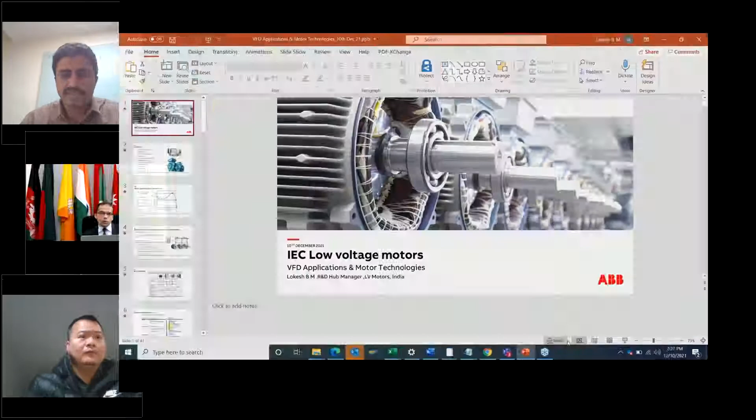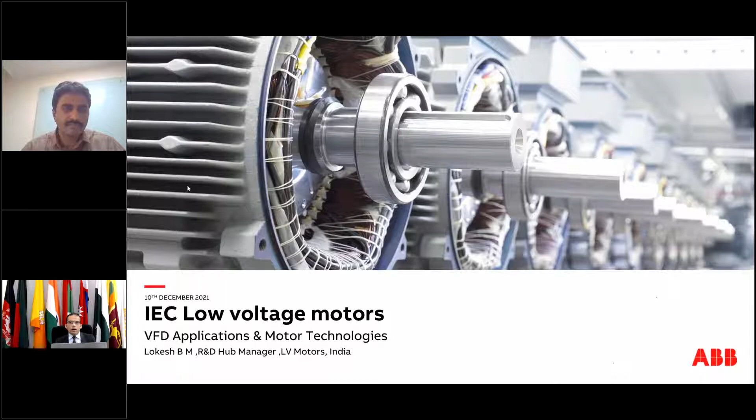Sir, excuse me, your screen is not visible. Okay, you may share your slide please. Can you give me that option for sharing? I can't see anything. Okay, now can you see? Yeah, perfect, okay thanks. Okay, let's get into the topics, what I wanted to share. I'm able to move the slide... not able to move the slide. Just click on the presenter, not on the software. Just click on your PPT file, PowerPoint file, and then you will be able to move it. Okay, yeah, now it's moved, I think. Yes, we can see your software.

Okay, thanks. So as I said, the main contents would be on motor performance characteristics. This is the basic concept. We see on the TS curve, the starting performance of the motor. With this, we go into why VFD duty motor, or why VFD is required for motors. Then there are certain points where on the checklist we need to go while selecting a motor for VFD applications. Then the type of loads, which is very important—we need to know what type of load, for which application the motors are being given. So we try to see different types of loads and have a look at that. Then of course the loadability curves with respect to VFD duty motor. Then we go into what exactly is the savings with respect to VSD. While we see all this, there are some challenges or precautions we need to take while using our motors for VFD, right? So this is also important, so we would like to cover that also, and what exactly we need to pay special attention to while selecting motors for VFD applications. Then finally, the learnings from all these slides. And then I would like to touch upon energy efficiency topics, and finally the case studies—I have collected some case studies where our motors have gone and installed at customer sites, and what exactly is the benefit the customer is going to have.

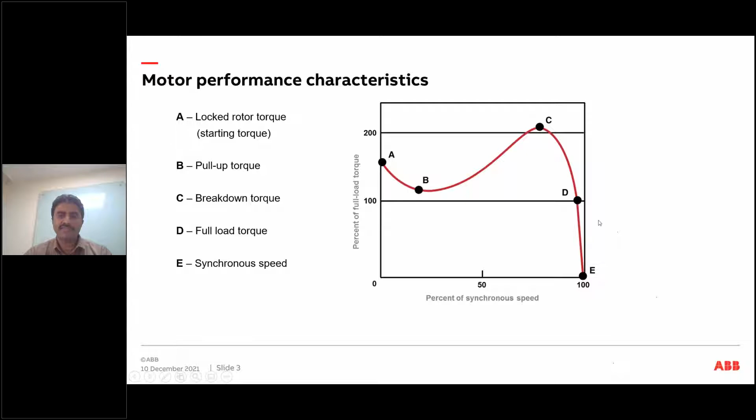C is the breakdown torque, or what we call POT, pull-out torque—in other words, the maximum torque that the motor can develop. This is on a DOL curve. So what exactly will happen with a VFD? This can be pushed much earlier at different speeds, or lower speeds also. So whatever is the maximum torque, that can move up to 10% RPM or maybe 20% RPM. So throughout the speed range, you can get the maximum output or maximum torque levels. D is nothing but the full load torque, and synchronous speed is what is mentioned as E. So this is the typical torque speed characteristics of the induction motor.

Now going to the next topic, when it comes to selection criteria of an induction motor for VFD applications. So what exactly do we need to take care of?

Why VFD? This question comes to everybody's mind. If you want to change the motor speed in a DOL application, would it be possible? Definitely it is not possible. So when you want to change the speed different from the rated RPM, you need to have some options. One best option would be using a VFD.

What are the main reasons we get more energy savings with respect to VSD, and also there are some other benefits. So we would like to see that.

We get a very soft start while using VFD, starting from 0 RPM to the rated RPM. It will be a very smooth start. Compared to DOL, what happens? DOL motors give full voltage and full current at a time. The moment you switch on the motor, it starts taking the full current, so the starting current will be very high, and accordingly you need to select all the equipment. In VFD, it will be a soft start because you are lowering the RPM at start and then reaching the maximum RPM.

What exactly is the benefit? You get a longer service lifetime with respect to mechanical components because it is a very smooth start, you are not giving any jerks on the motor. Then on the finished product, you are controlling the speed and other things with the most precision, so on the process side you get the best quality of the product. Overall, it also increases the efficiency of the system.

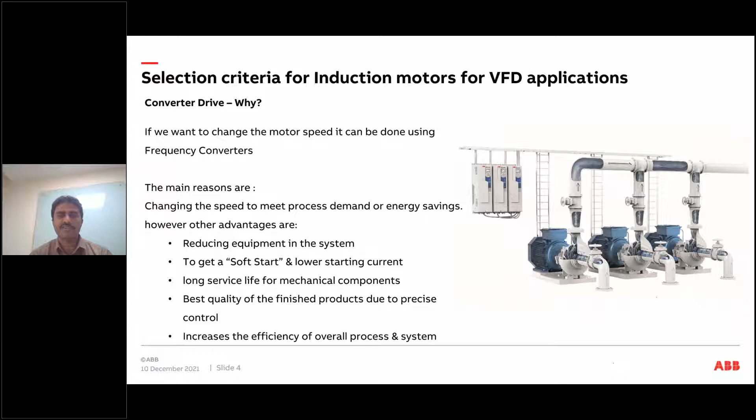So going to the next, this is the basic principle. Whenever you are dimensioning or selecting a motor and drive, you need to consider some important parameters listed here: the network side, the converter aspects of what VFD unit to select, the motor point of view, and also the load perspective. These four things have to be considered for a VFD duty motor.

On the network side, you need to know what voltage is coming onto the motor from the input side, from the transformer side - like 380, 415 or 690 volts. Depending on that, the insulation systems will also change with respect to the motor. For a 415 volt system there is a separate insulation, and for 690 volts there is a separate insulation. I will come to that topic in the next coming slides.

Similarly, from the converter point of view and the motor point of view, you should know the thermal loadability of the motor, and also the speed range - what is the minimum speed, maximum speed, which is also important, and the maximum torque required, so you should know what maximum torque it can deliver. From the converter point of view, you need to know the load type, whether it is a centrifugal curve, constant torque, or constant power. These things are very important while selecting or dimensioning the motor for VFD. So all these are the four parameters you need to consider.

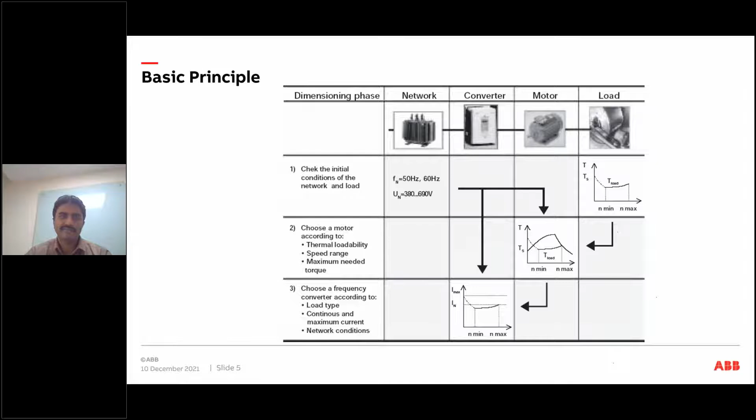You need to know exactly what voltage is coming onto the motor terminals so you can take precautionary measures. There's a new IEC standard that has come into picture which mentions IVIC class category, and it mentions the starting levels and severity levels with respect to A, B, C and D categories, with D being the extreme. So we give the insulation class which is able to meet the C category level.

We should know what exactly is the site condition, what is the voltage level at site. So all these parameters like peak voltages, dV by dt, rise time, bearing currents, or any overheating due to harmonics, all these things have to be studied before offering the motor for VFD application.

Also, as I said, you should know the maximum torque. Bearing construction and lubrication is also an important factor because for VFD applications there will be circulating currents if we go to higher ratings, like from 100 kilowatts and above. So there may be chances that the bearing might fail.

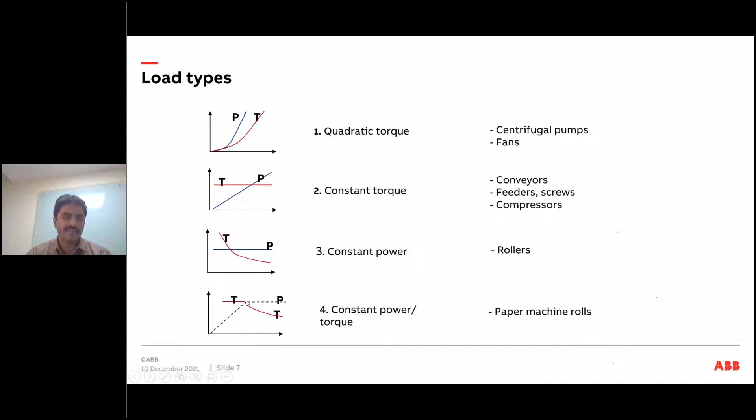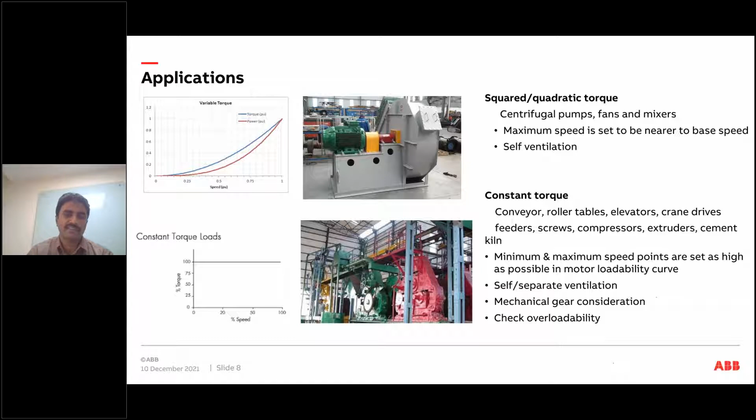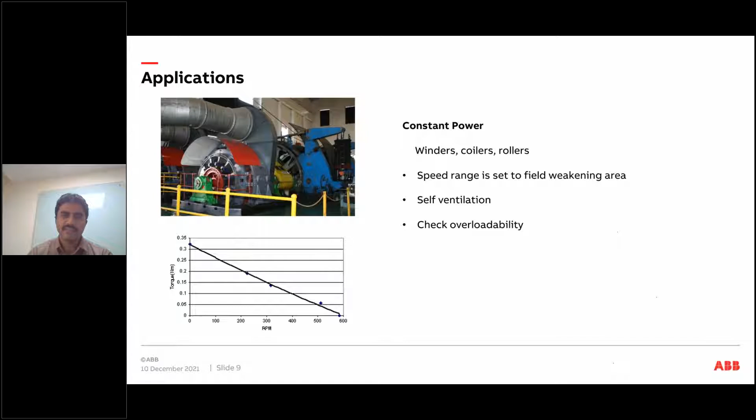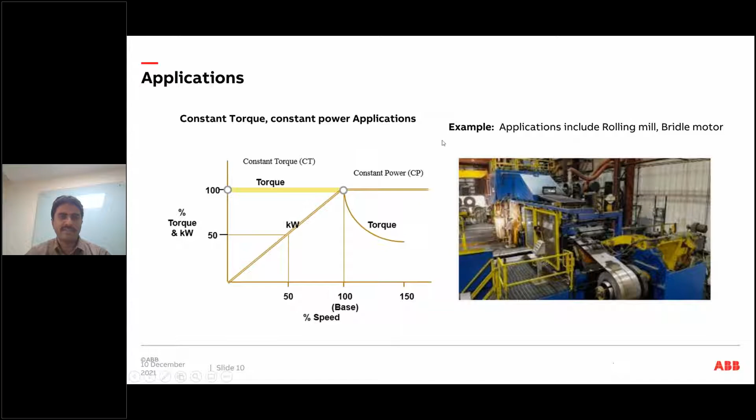Now after seeing the different loads, we jump to VFD energy savings. So how exactly do we get the benefit while using a VFD?

If you see a traditional pumping station or pumping system, it is controlled by a mechanical system like throttling and other systems. What exactly happens is you will not have control on the flow, so therefore there is no energy saving with respect to a traditional pump.

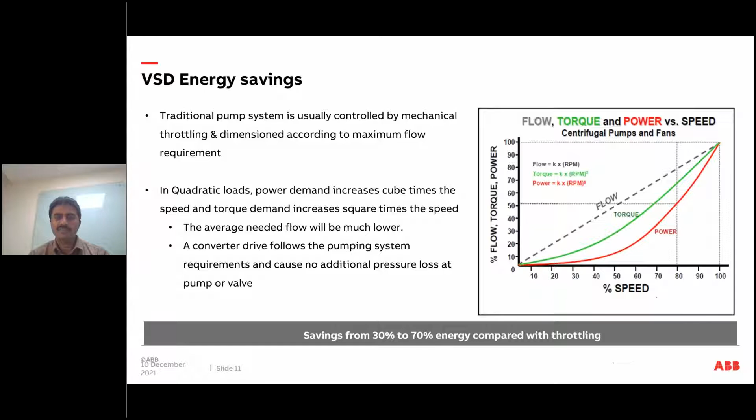But when you are using a VFD, you can much more precisely control the flow by varying the speed. A converter drives the pumping system according to requirements, and therefore there is no additional pressure or loss in the pump or valve. This is the benefit you get. The savings from this can vary from 30% to 70% with respect to throttling application.

I would like to take one example here to show you which of the methods is better when controlling a pumping system or pump application. If you see from the affinity laws, how does the pump or fan vary? We've seen in the previous slide: flow is proportional to speed, pressure is proportional to the square of the speed, and power varies with respect to the cube ratio.

When we take a typical example, a pump running at 80% of its nominal speed will produce 80% of its nominal flow. If you see here, 80% of the flow, but when it comes to power consumption, it is only 50% - the dotted line shows only 50% energy needed. Now you can understand what is the requirement here.

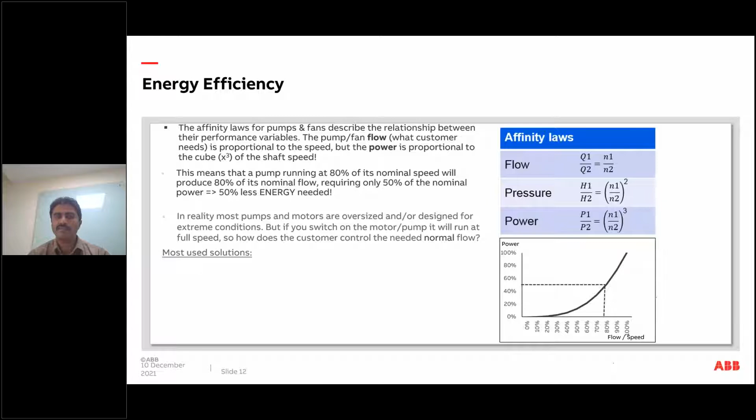But in reality, most pumps at site are oversized or over-designed due to considering extreme conditions. If you are not using a VFD, when you use a DOL and switch on the motor, the pump will operate at full speed, so you will not have any control with respect to the normal flow.

Let's see the different methods used on the traditional aspects. One is throttling, where you control by closing and opening the valve - this is one traditional method. The second traditional method is bypassing, which is also very popular. And the third is on-and-off control. These are some of the traditional methods the pumping system has used.

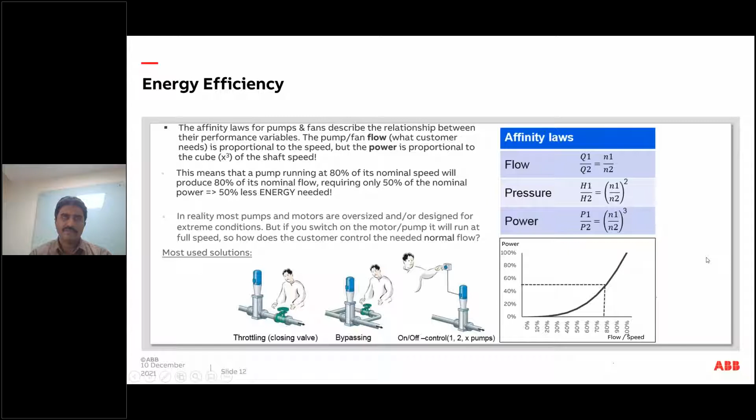Now let's continue with that example and see how these traditional methods behave with respect to energy efficiency. We take one example comparing the needed flow, considering 70% of the installed nominal capacity. So with respect to 70% of the installed nominal capacity, what exactly is the power consumed?

By bypassing mode, with similar calculation, the power consumption is 82%. So definitely this is also not energy efficient.

When it comes to on-off control, when you calculate the power saving, only 70% of the energy is used. So definitely this is also not energy efficient.

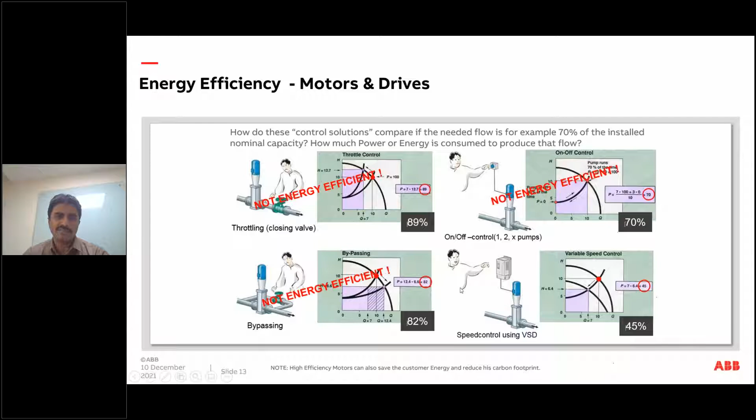The same application, when you prefer a VFD, you can see the curves here - the power consumption is 45%. So you can compare all three traditional control applications with the VFD, and you have a better saving here. Definitely this method is preferred for energy saving.

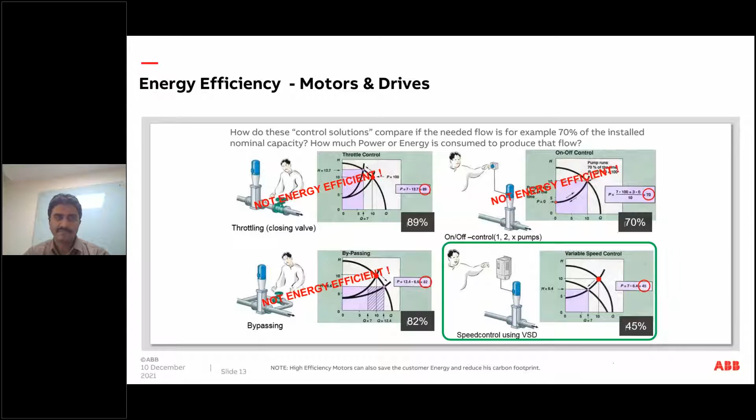So similar to the pumping station example we saw with one single pump, when we talk about system efficiency, here we have a pumping system with two setups: a conventional pumping system and an energy efficient pumping system. The energy efficient system shows a huge difference, where the system efficiency of the conventional system is 28% while the energy efficient pumping system is 82%.

So what exactly makes this difference? If you see the motor, the standard motor used has an efficiency of 91%, but the energy efficient pumping system uses an energy efficient motor with efficiency of 96%. This is a huge gap, and it's contributing to the energy saving.

What happens with respect to this? When you do the input power calculation, the input power consumed for this particular application is 122 kilowatts. For the conventional system, it is 358 kilowatts. You can see a huge difference here, and that is why the efficiency of the pumping system has been increased.

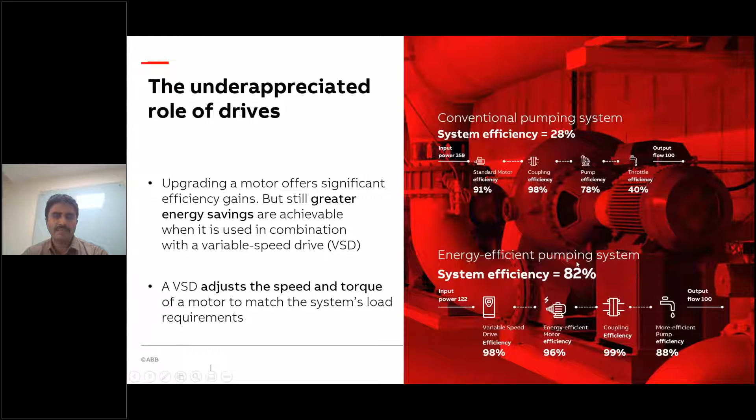Moving on to the next slide, as I said in the beginning, while selecting a VFD, there are certain conditions or criteria we need to consider. These are challenges or problems to prevent by using VFD motors, and one such topic is the winding insulation. This is a huge topic, but I won't go into much detail here.

On the insulation grounds, for different voltage levels the insulation category is going to change, because the higher the voltage, the higher the stress on the winding. So you need to take care with respect to the winding system. Winding is the heart of the motor, so you need to give a lot of precaution with respect to VFD applications.

If you talk about the 500 volt system, UN is nothing but the rated voltage. If it is less than or equal to 500 volts, we prefer standard insulation. If it is less than or equal to 600 volts, you need standard insulation plus a du/dt filter, or you can go with special insulation instead.

What happens if it is less than or equal to 690 volts? For 690 volts, you need to consider special insulation and also du/dt filters at the converter output. You might have experienced that for any 690 volt drive, the du/dt filters are by default included. And for 600 volts or less than or equal to 690 volts with a cable length greater than 150 meters, you definitely need special insulation.

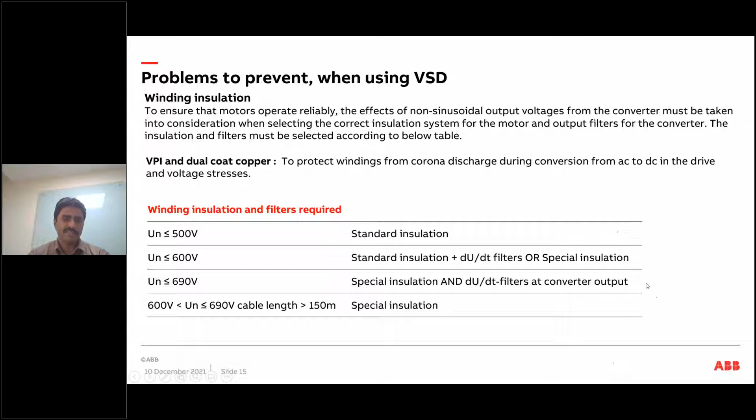Talking about bearings, when exactly do you need an insulated bearing? For VFD applications, you need to keep in mind there will be a circulating current. Every motor will have a circulating current, but as the rating goes higher and higher, the circulating currents will also be higher, which will harm the bearing. Since it's a circulating current, it forms a closed loop, so bearing damage can happen. So how do we prevent this?

For ratings lesser than 100 kilowatts, we don't have to give an insulated bearing because it's not so harmful—this is based on studies we have made. Similarly, if it's greater than 100 kilowatts, or falling under the 315 frame, or the 355 frame, you definitely need to give an insulated bearing at the non-drive end.

Why do we prefer the non-drive end? Because the starting point is from the shaft, and it will circulate through the non-drive side bearing. So if you provide insulation at the non-drive end, the circulating current is going to break there—to break the loop, we give insulation at the non-drive end.

There are some other options other manufacturers give, such as providing insulated end shields—that's also an option. Whatever we do, we need to break the circulating currents, that's the intention. Any rating greater than 100 kilowatts, or in the 315 frame, will go with an insulated bearing at the non-drive end. For 400 frames and less than or equal to 500 frames, we need to give an insulated bearing and also a common mode filter, which we'll talk about in later slides. This will also reduce the bearing currents.

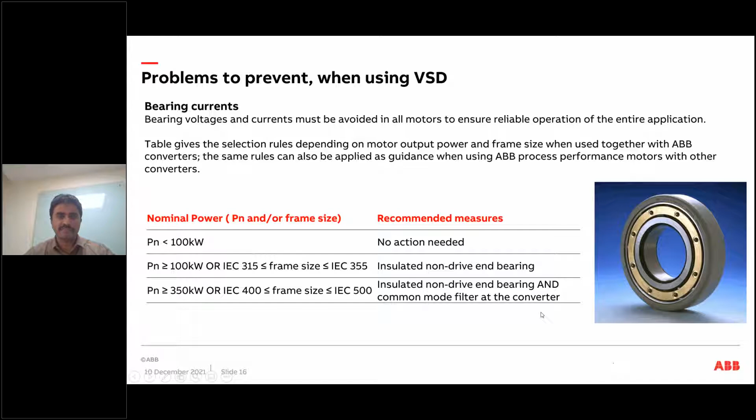So we saw the insulation part and the bearing selection. Now we talk about the entire system.

What is EMC? We call it electromagnetic compatibility. This is nothing but when we use high frequency components in the VFD, this might cause electromagnetic interference. Definitely there are other equipments connected at site, there may be plenty of equipments where motors and drives are there, so they should not harm the other equipments because of this interference.

So how exactly do we do that? You see the picture here, there are certain things we need to take care of. On the cable part, we provide proper shielding to the motor terminal box, and there are possibilities where we can provide EMC glands which are available, and also EMC cable boxes. So by providing this, the problem of electromagnetic interference can be avoided.

So another aspect with respect to common mode filters and DU/DT filters. We will see what exactly is the difference. What are common mode filters? Common mode filters are nothing but they are installed at the output of the frequency converter. You can see the picture here on the right hand side, these are circular cores which are in red color, these are the common mode filters, provided at the output of the frequency converter.

So why do we give this? These common mode filters definitely will reduce the risk of bearing currents. That is the reason we talked about bearing currents there. So by providing this, you are reducing the bearing currents.

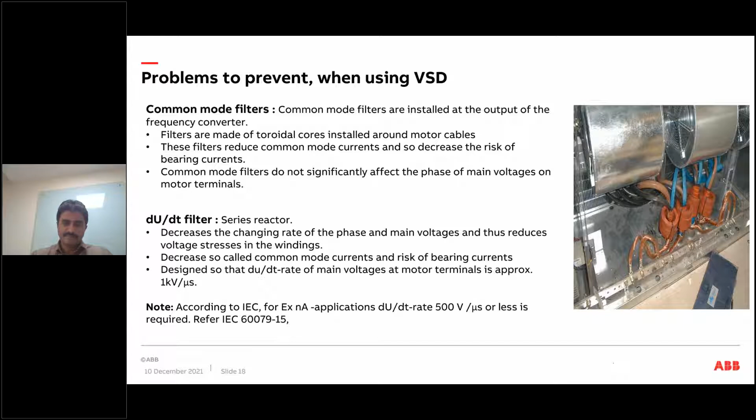So what exactly we learned from the previous slides, I will just put on the bullet points here. You can read here, the first point would be on the selection of the motor, like select the motor according to the correct load type. You need to know the load, what exactly is the load, and what exactly you need to give from the motor or drive perspective. This is an important point.

So use the correct minimum speed for the constant torque drive. You need to have the minimum speed and maximum speed, this is also very important with respect to applications. Sometimes you give force ventilation, so it can be more optimized than self ventilation.

So force ventilation, when do we give it? When we have a speed range lesser than maybe 30% of the speed, there we recommend force cooling. If you are opting for force cooling, you can give it in the same frame because that is being taken care of. And if you are opting not to give force cooling, then we can still give that, but the frame has to be derated. That is why I'm saying it can be more optimized sometimes with respect to self ventilation.

So the fourth point is on limiting the temperature rise with respect to class B. If you see the insulation perspective, most of the insulations what we give is class F, and when it comes to temperature rise, it is limited to class B. So why do we limit with respect to class B? Definitely the temperature rise is one of the important factors.

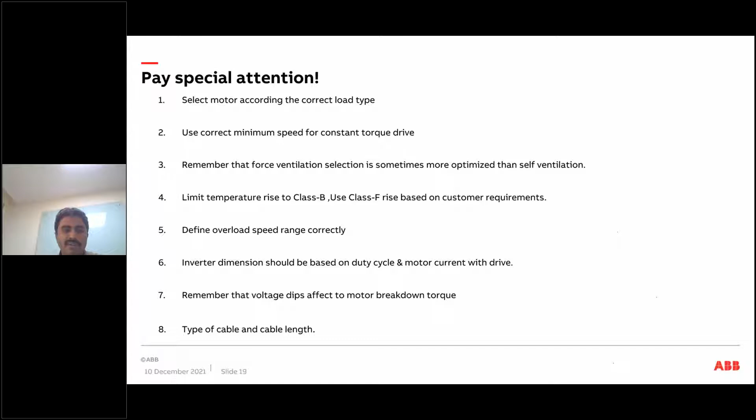Finally, concluding on this, whatever you saw on the previous topics - there are 5 questions you need to ask. What is the application, which is very important? What type of load, the speed range, and the overload cycle? So the first 3 are very important, and then type of VFD. This also matters sometimes, and whether the motor starts with DOL or not. Sometimes we get an inquiry where even though it is for VFD, they want the motor should be suitable for bypass DOL. So if you're not considering the DOL option, you can end up with problems with respect to starting current. All those aspects will come into picture.

I think we are covered on the VFD part, on the application part. So now we will jump to the energy efficiency part.

Before going in, this is a general slide, most of you might have seen. If you see the electricity used by the power industry, greater than 40% of the electricity is used by the power industry, and when it comes to motors, two-thirds of it is used by only electric motors. So now we can imagine why motors are very important. There is a huge place where you can do energy savings with respect to giving energy efficient motors. So our job, as a manufacturer, our option would be to save energy and optimize operations in a sustainable way.

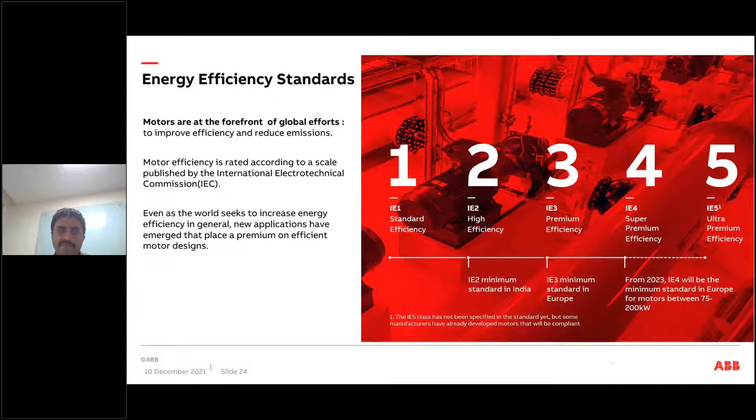So whenever we talk about efficiency, we always say efficiency from IE3 to IE4, IE3 to IE5. So what exactly do we do? Talking about efficiency is nothing but output by input.

There are loss factors which are considered, like I square R loss with respect to stator and rotor, and different losses with respect to friction, windage, and stray load loss. The moment we try to reduce the different loss factors, your efficiency is going to improve. So that is how we do it.

But when I talk about the positive effect on the life cycle cost, there are 4 important parameters we need to consider: the quality of the motor, the noise levels, the efficiency class, and the temperature rise. If you are taking care of these 4, you will have a very positive effect on the entire life cycle cost. So how exactly do we do it?

As I said, there is high permeability steel or superior steel quality, so the iron losses are going to come down, thereby reducing the magnetic losses. Similarly, you're putting more amount of copper in the windings, therefore the I square R loss, the copper loss, is going to reduce.

So how do you improve with respect to quality? Definitely there are improved bearing housing designs, use of quality bearings, and grease. So all these things relate to the quality of the product, right?

From the noise perspective, definitely you can go for improved airflow, improved fan designs or fan cover designs, or bearing designs. So this is how you reduce the noise factor.

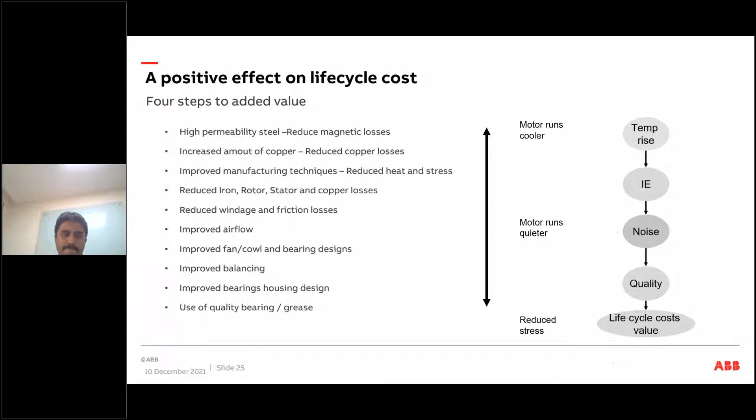So talking about different technologies, these 3 are the running topics on motor technologies. If I talk about the induction motor, definitely there are certain limitations above IE4. When you start designing or reaching IE5 levels, it is very difficult with respect to induction motor technology.

That is why there are different new technologies which have come into picture, like SynRM, synchronous reluctance motor, or a permanent magnet motor, and for the next futuristic technology, maybe a ferrite assist SynRM motor.

Talking about SynRM, it has a great advantage compared to all other technologies because there are no magnets in this rotor. If you see the rotor design, because of this new rotor design shown in the picture here, there is no induced current in the rotor. So therefore there are no rotor losses. Completely, the rotor losses are zero. So you can imagine the difference in efficiency.

We will see in detail much higher advantages. On the efficiency point, there's higher power density, accurate speed control, lower bearing temperatures, and it's easy to maintain because there are no magnets here, only the rotor profile is different. So you can straight away replace the rotor of a SynRM rotor on an induction motor.

So that kind of flexibility is also available. As a package, efficiency is always verified with respect to testing and designed exclusively for variable speed operation.

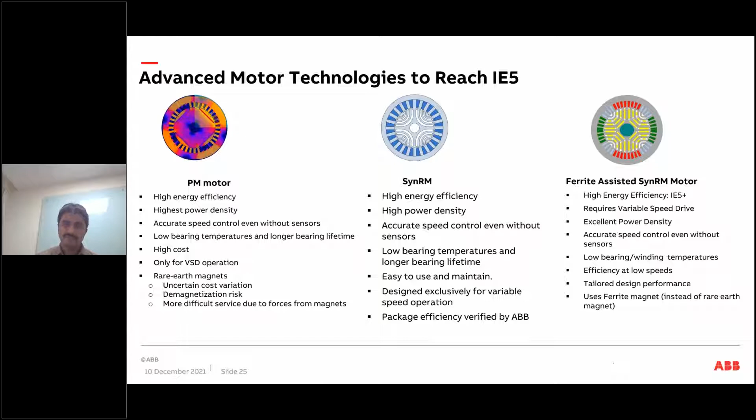So talking about the innovative motor and drive packages, when it comes to a package with respect to SynRM technology, you can see here there is a standard motor you can add with a special rotor of a SynRM design.

And when it comes to the standard drive, you don't have to replace the drive. There is new software which can be inserted in the module. So you can still use the same standard motor, standard drive, with a special rotor and new software. So it gives a revolutionary drive package.

And in this, we have two options where there is a high output SynRM package. Higher output means you are giving a higher output in maybe a lower frame. So what happens in this? When it comes to overall equipment size, definitely it is going to come down, and from the cost perspective also you will get maximum benefit here. So this high output package series is also available.

And the IE5 ultra premium efficiency SynRM package, as I said, energy losses are reduced by 40% compared to IE3. And the most advantage would be these are interchangeable with IE3 induction motors.

So what is the key to success with respect to SynRM technology?

If you look at the IE3 induction motor, there are different kinds of losses. From the 100% losses, you have rotor losses, stator losses, and other losses like friction and windage. On the IE5 SynRM motor, straight away 40% of the losses, the rotor losses, are eliminated because there is no induced current, so there are no losses in the rotor. You get a 40% reduction in losses, so definitely your efficiency is going to increase.

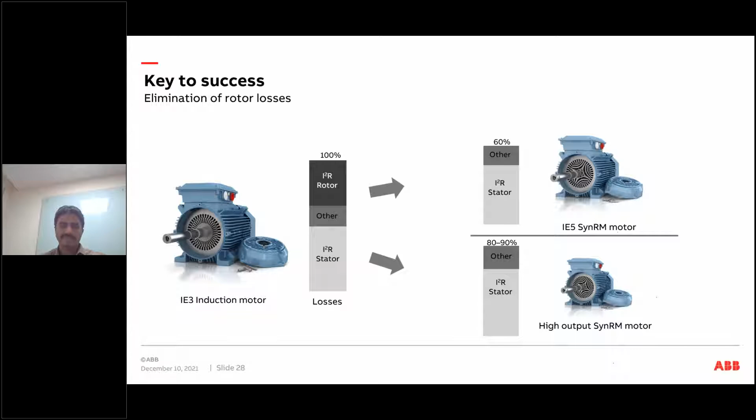Overall, these are some of the benefits when I talk about induction SynRM technology and drive as a package for a customer. These are magnet-free designs, so there are no magnets, making them user-friendly and service-friendly. Packages are available for quadratic torque applications like pumps and fans, and these are very competitive with new technologies. From the reliability point of view, there's lower bearing temperature and a lot of benefits. These are designed for variable speed operation, and advanced open loop control softwares are available. On the support side, you have global ABB support, though not many models have been given and there isn't much experience yet with SynRM technology.

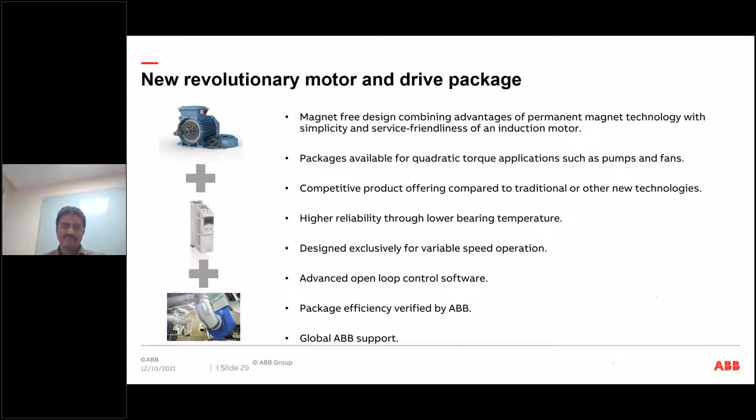I also wanted to touch upon a topic that's coming in the future. A new standard has come, IEC 60034-30-2, which defines IE class efficiency and also allows you to compare different technologies.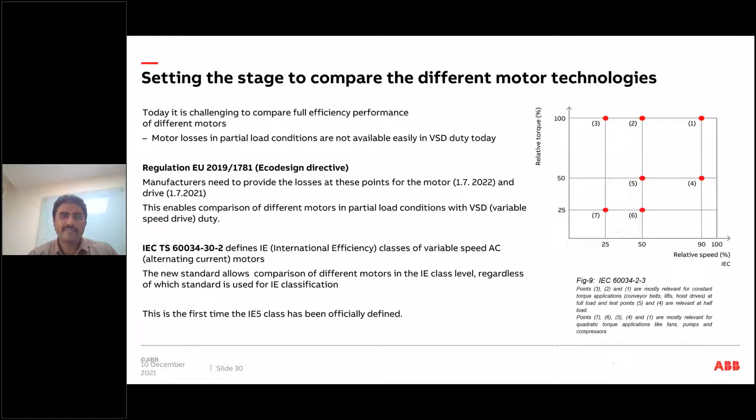This will definitely be implemented next year. So talking about SynRM here, this is why I mentioned the different load points at different speed variations - it's very important.

So imagine, at partial loads, a benefit of 6 to 7% efficiency means significant savings. You should also keep in mind that none of the motors at site operate at full load, so there are a lot of savings expected with respect to this.

Continuing this, the standard package efficiency is 92.5%, and here it is 94.2%, an increase of 2%. When it comes to CO2 emission, it is reduced by 2%. Just to give an example, the CO2 reduction from a 110 kilowatt IE5 motor in a year may be equivalent to taking 5 petrol-fueled cars off the roads.

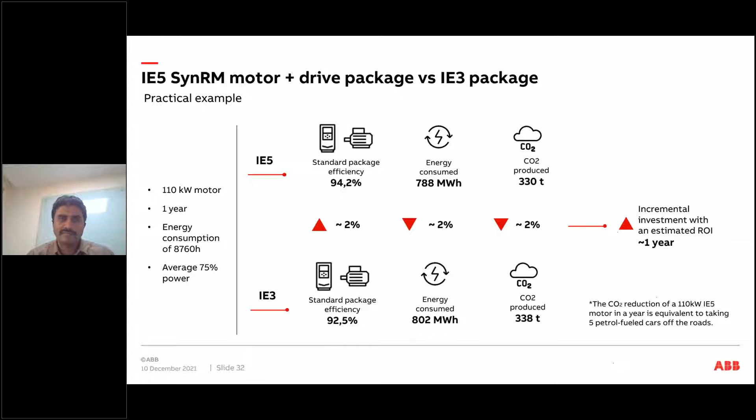So talking about one more aspect of cost of ownership. This is also an important point when it comes to buying a new motor, a replacement motor, or a rewind motor. So what is cost of ownership? You can see the picture here.

Cost of ownership is nothing but you have a purchase cost, a cost of running, and you should also consider the cost of not running. That means you should consider the downtime also. So if the motor fails or stops during operation in the process industry, you can imagine the amount of production loss which happens. So that part should also be considered.

So this will give you an idea why, on the long-term aspects, whether to buy a new motor or a replacement motor.

After this, I just wanted to touch upon some of the case studies I've listed here. This is one example in India, Shri Mahabir Ferro Alloys, a metal and steel manufacturer, located in Rourkela. ABB had offered IE4 motors, 184 numbers. On this side, all the motors were running on DOL or either Star Delta or some other starters.

But when the proposal was given for a VFD, they were replaced. Out of 184, in the first phase, we replaced 68 numbers with VFD. So you can imagine, with these motors the benefit was around 250 megawatt hour savings. Further potential of around 550 megawatt hour was there.

For the balance 116 out of the total 184, considering that, you have an additional 550 megawatt hour. All these applications were related to compressors, pumps, conveyors, gearboxes, pellets, and similar equipment. So all the motors were replaced, and the overall savings is equivalent to the average annual consumption of an Indian village. You can just compare with that.

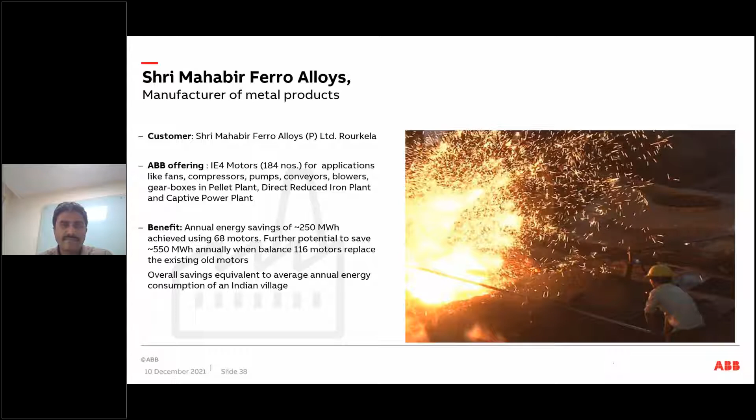So the next example is Alufluoride Limited, a pharma or chemical company. Again, this was through an OEM, D. Parikh Engineering Works, selected in India. The place was Visakhapatnam, and a 200 kilowatt AC motor along with the AC regenerative drive was given.

Because it is a regenerative drive, all the losses are fed back into the system, so you are again saving energy there. Overall, the annual saving is around 66 megawatt hour, which is equivalent to around 4 lakhs savings per machine, and the return on investment is less than 3 years. So you can imagine the importance of energy efficient motors.

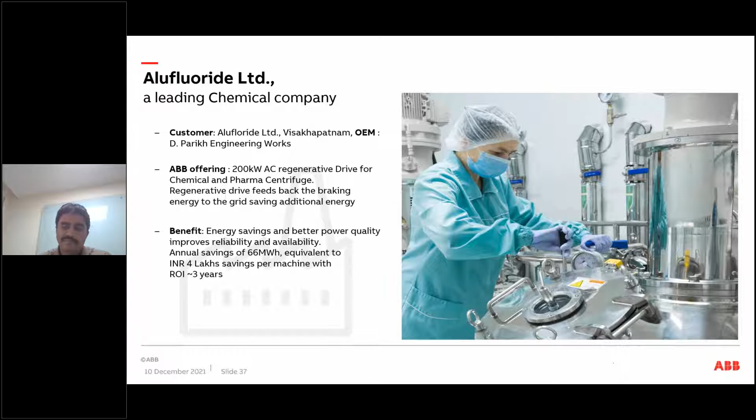The next case study is on SynRM drives, in a Netherlands plant. These are pumping stations where they supply fresh water to their customers, and this customer gives a lot of importance to sustainability. So there was a very warm welcome from this customer for the first SynRM motors used here along with the drive. With this, we got savings of around 20%, delivered including the ACS 880 used along with these motors as a SynRM motor package.

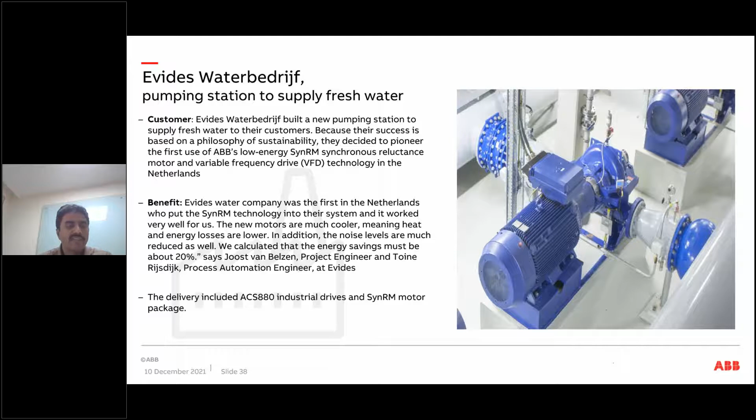Another example from India is Orchid Laminates. This is a recent one where 13% saving was achieved. This is a 55 kilowatt SynRM motor of IE4 efficiency class. This was also through an integrator, Rcube, and 13% energy savings was given here.

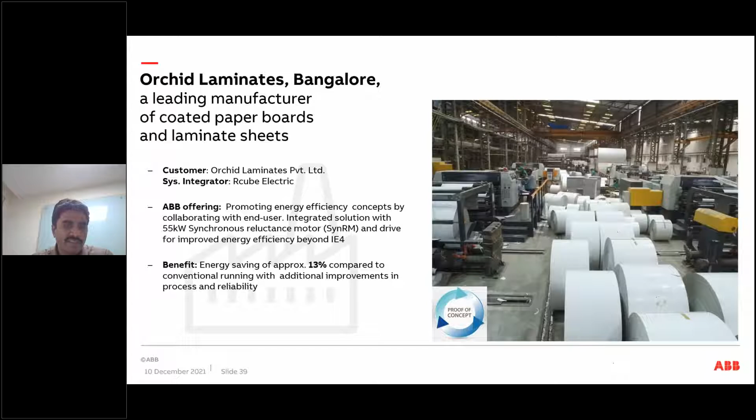So this ends my presentation. If you have any questions, we can answer now.

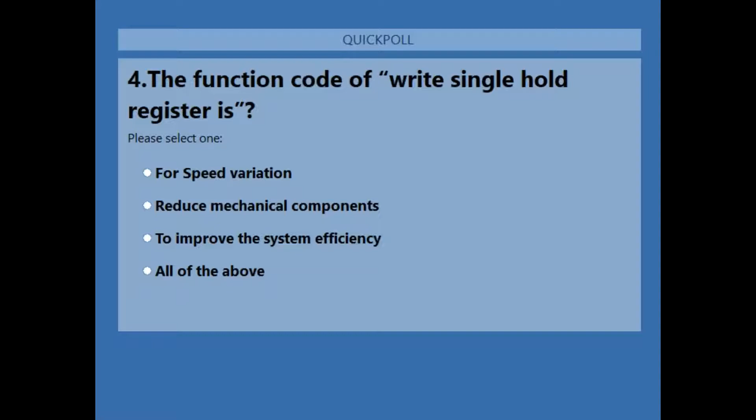This is not a good question - I think the question and answer do not correspondingly match, so we should ignore this question. It's a wrong question because the function code of write single holding register is 3, 4, or 5 - I think you mixed the question between yesterday and today. So this is a wrong question, we should ignore it. Go ahead, it's wrong.

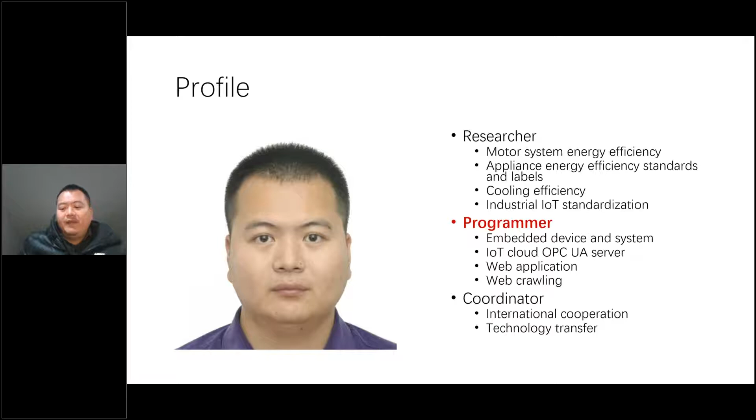Today I think my introduction will be a little bit shorter than yesterday or even before, but still have a lot of things to introduce with you. And this is our today's introduction.

First, I would like to introduce something about the Industrial Internet of Things. I already mentioned yesterday that Modbus is one of the most important protocols for this IoT, but today I want to share something about IoT itself. I think you've learned about this or heard about it on many occasions, but I will give some definitions, actually borrowed from some other sources.

Second, I would like to briefly introduce the IoT communication protocols, and highlight the importance of a common understanding of communication protocols internationally. Then I would like to introduce OPC UA, and show you why and how, like before. I would also like to show you some OPC UA use cases.

Actually, the smart pump demonstrator, my smart socket, and also my smart home are all based on this OPC UA communication protocol between the server and client side, and even the communication between the on-site gateways and the cloud. I will also demonstrate something later.

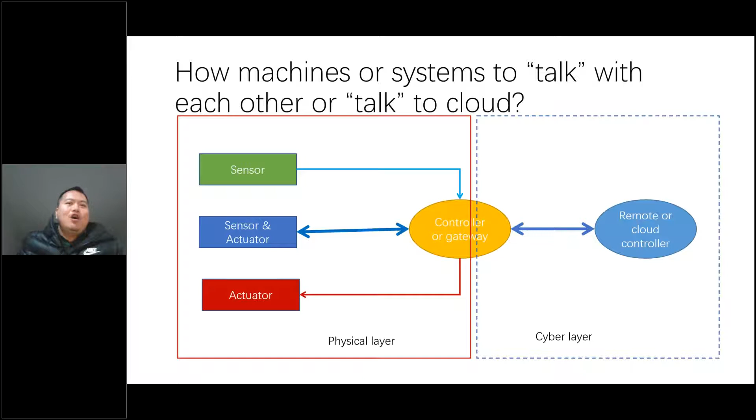But first, I would like to show you something of my understanding of the IoT. Actually, I use Google search to find typical, from my point of view, the typical diagrams from the internet.

And right now in China, we also use mobile phones to control everything. Take one example, the cashless world. In the last half a year, I haven't spent a cent of cash in China. Maybe it's not related to industrial IoT, but still that means in future we can use modern communication technologies and also some well understood communications to achieve a lot of activities we couldn't before.

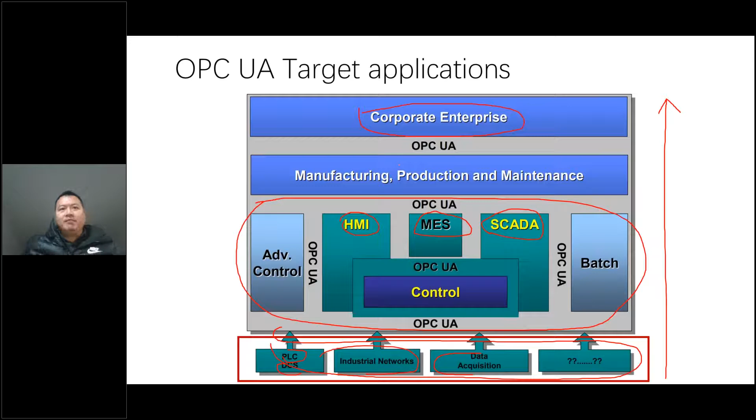You see, they connect with each other, and with this view it seems like a tree, like our file system. We can open it like Windows. We can use this kind of C drive, D drive. If we can access the C drive, we can go to the folder list, and then we can go deeper and get different kinds of files.

Then it can be subscribed. You can monitor the nodes. If the node changes, the information will be transferred to the subscriber. You can get the information automatically. That's one important mechanism of OPC UA.

I don't think I want to go into this in detail, but it's subscription. That means I subscribe to changes of one object, maybe one meter changes. When it reaches maybe some value, it will report the changes to me. Then I can get the latest data.

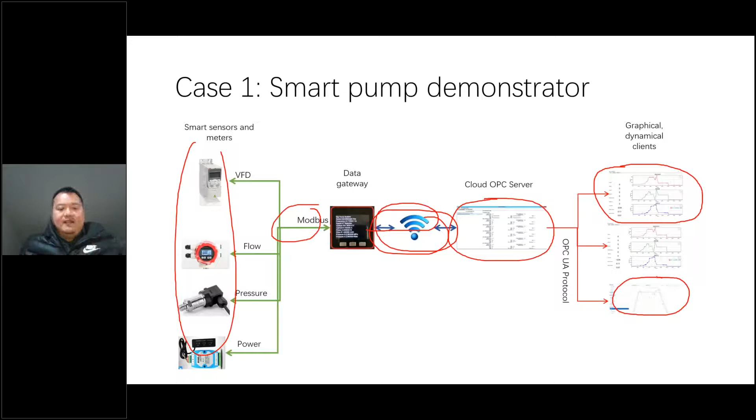I'm going to show you something different. This is a general client. I just get the address, put it in, and then I can connect to the server. The certificate is trustful, so then I can browse the server like a file browser.

This server object is the standard server configuration of the operation system, and also shows their status. I don't want to show you again, but it also shows some server operation status. I'm focusing on the pump demonstrators.

Right now we open this folder. We can see that we have two pump demonstrators with ID 10,000 and 10,001. If I open this one, 10,000, then we have a lot of nodes, like file nodes. If I click this one, it shows the information of this node. The node ID means a special unified ID, and also it shows a method - I can call this method to take some actions.

This method means I can activate the timer on the server, and this is the object of the big pump system, because we have 5 pump systems. For each pump system, we can get input power, input current, input voltage, and also the PID flow set point. And then we have some other statistic features I don't want to explain in detail.

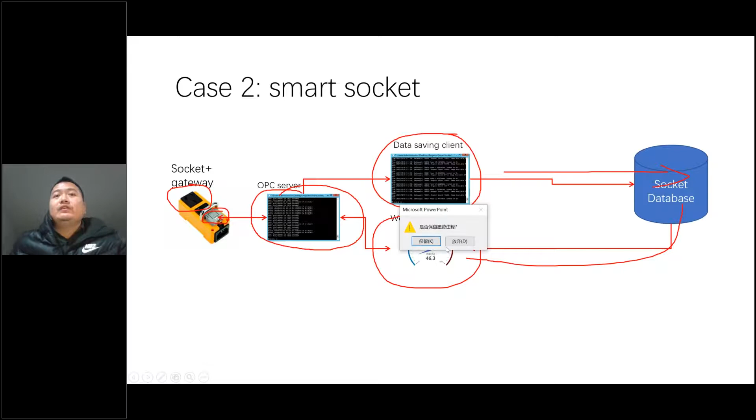I'm going to show you - I have a cloud server, connecting with Windows Remote Desktop. You can see this is the smart socket server, that means it receives data from the gateway, from the socket. That means it has power.

It has relay - is on, meaning it's on and off. Indicator status means it's receiving the data from the underlying gateway, and it also shows it, because I turned it on for demonstration. This is a server - actually this is the data saving client. For each 1 minute it connects to the server to take the data and store it to the database.

And then I can open, wait for a while, I can open this web portal.

See, I can see the instant value of the web portal, and I think it indicates it's connected. I can turn it on and turn it off here. I don't want to demonstrate again, but maybe I'll demonstrate this one. It will not affect my family's electricity consumption. I can turn it off. Click.

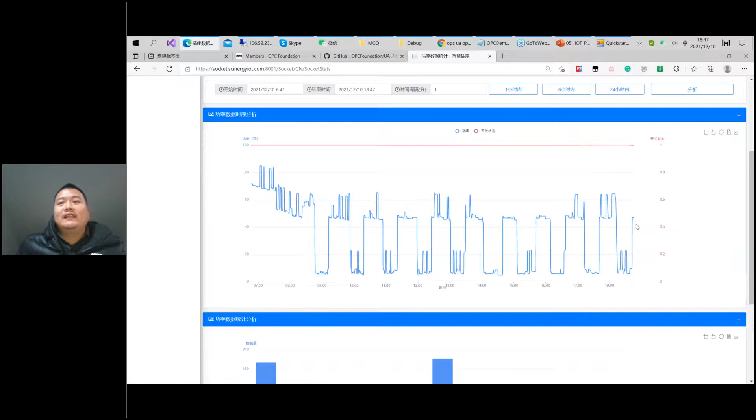Still, I'll demonstrate this. The server has multiple clients, and here I can get the data, the analyzed result. I store the data to the server. This is the energy consumption of my refrigerator. Okay, that's the same thing.

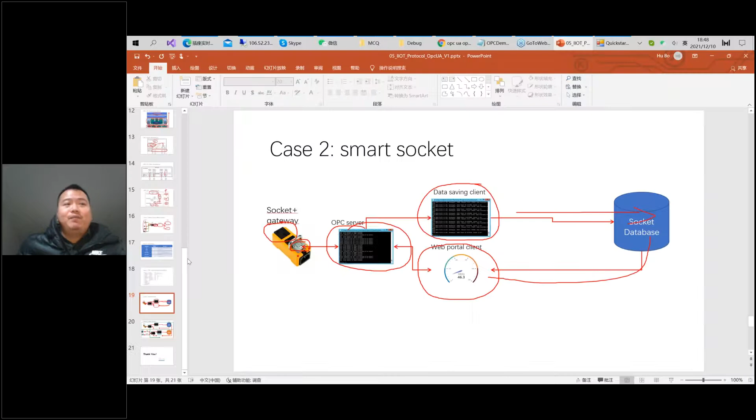I want to try it again. I don't know why, but... I don't know, maybe. Okay, this is a smart socket. The time is pushing to the end.

Okay, I have to log in. Then we have the instant information of the power meter. Okay, you can see that. Right now, you can see the family consumption is almost 500 watts, and also the power factor, and also you can see the air quality. I already showed it, and then it has a data saving client.

Maybe I will show you also the server. And this is the data saving client. It takes the data, active power, the PM 2.5, then saves it to the database. And this is the server. It receives the data from the gateway and also shows it.

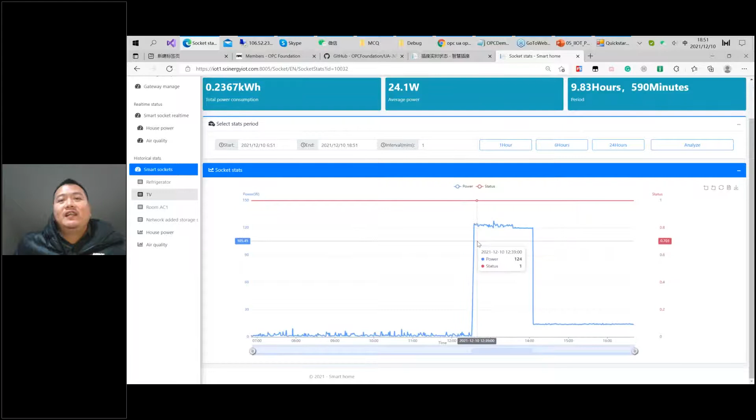See, right now I can see that the TV, when it turned on today, my boys turned the TV on like 12:30, and then switched off. Okay, this is the advantage of OPC. That means it provides a soft interface.

Of course, I can also use this client. I will show you maybe like a smart home server. Again, I just connect it. I can browse it. This is an air sensor gateway host, meaning it's a host folder for all the air sensors. This is the power meter gateway host. Right now, I virtually have 5, but actually only 1 is available.

Then I can get the air sensor status. Here's the value, I can get the value. We can see the value. And this is the power. Also, this one we can see the power status here. I can see the power status of the value.

That means with OPC UA, we can have access with one address. You just need one address. And of course, you have to exchange the certificate. I don't want to explain right now because it's a little complicated. Exchange the certificate, then use the address, then you can access the access point, then you can open the folders. It can explain the structure of the server. Then you can take the information that you want, and access it by subscription, by reading, or anything you need to get access to the data of the server.